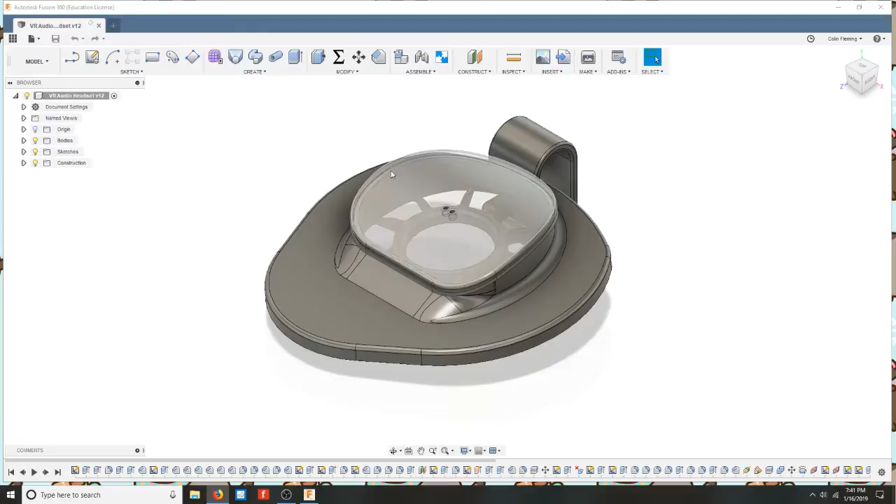Okay, so this should be going through. Okay. So here we have, let's just go to the beginning here first. Oh man, I have to explain all this.

So, I'll start with this. This is the driver area. This is the driver circle itself. That is the ring the driver fits in. It should fit in, but it turns out there's a glitch. Watch what happens when I try to change this to 43. Failed to solve, even though it clearly should be able to solve it.

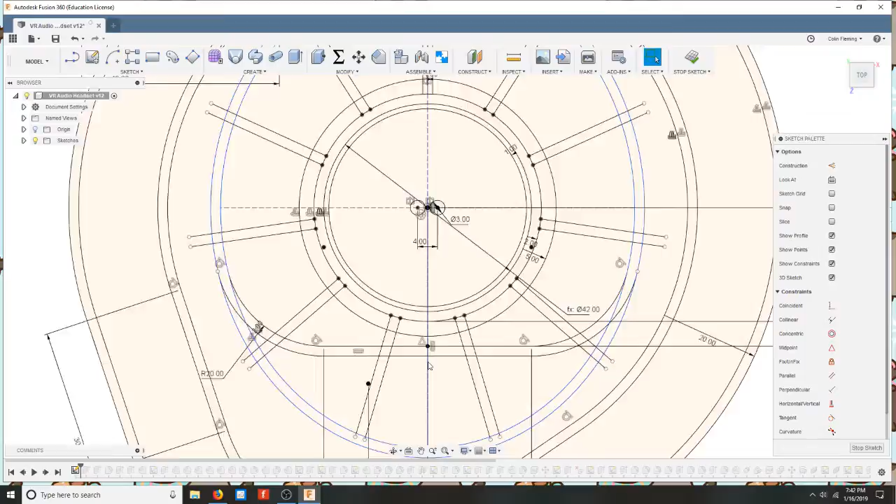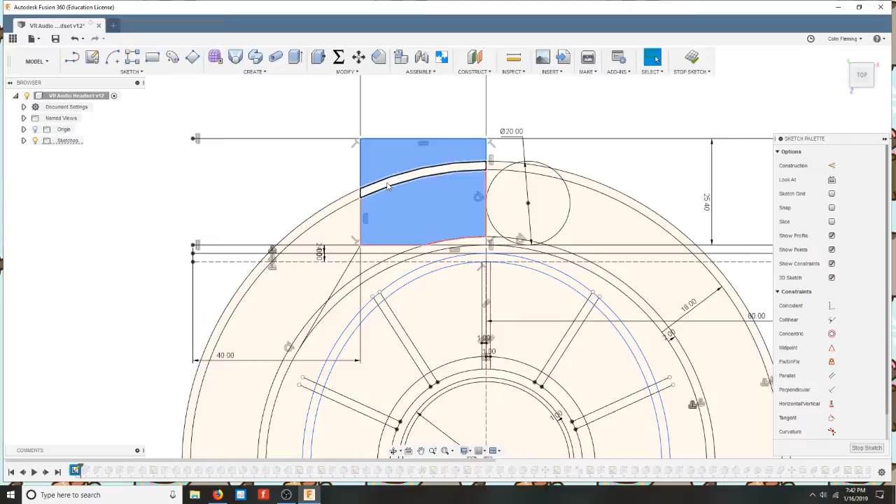So here, what is this one? Oh yeah, that's the pad area here, right here where that's highlighted. There we go, now you can see it. This, this little area in between, and that area. That's the area that will clip onto the band this sits on.

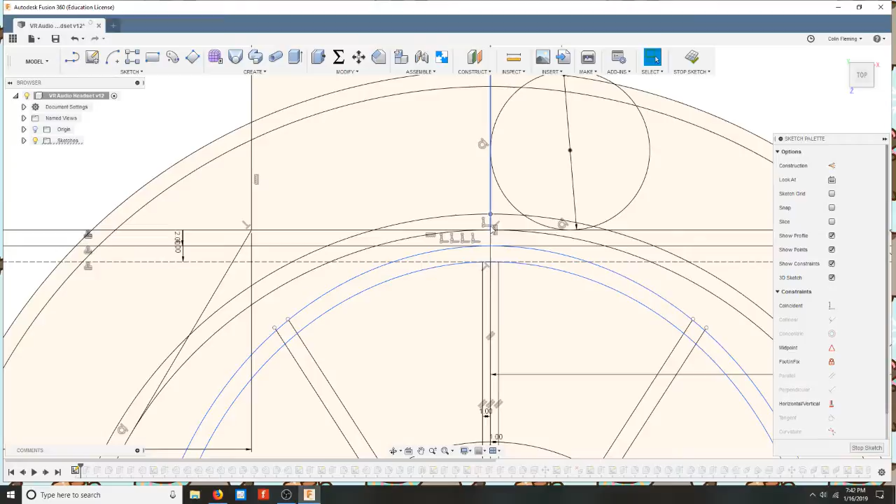Here's a little circle for a fillet, because one of the extrusions is gonna come up to here and get non-manifold at this point, right there. So now, here are all the ribs. Here's openings. Here's the bottom of the main acoustic cavity. Here's the edge of the acoustic cavity. There's more driver mounting area. Those are the ribs that hold the driver mounting area in place.

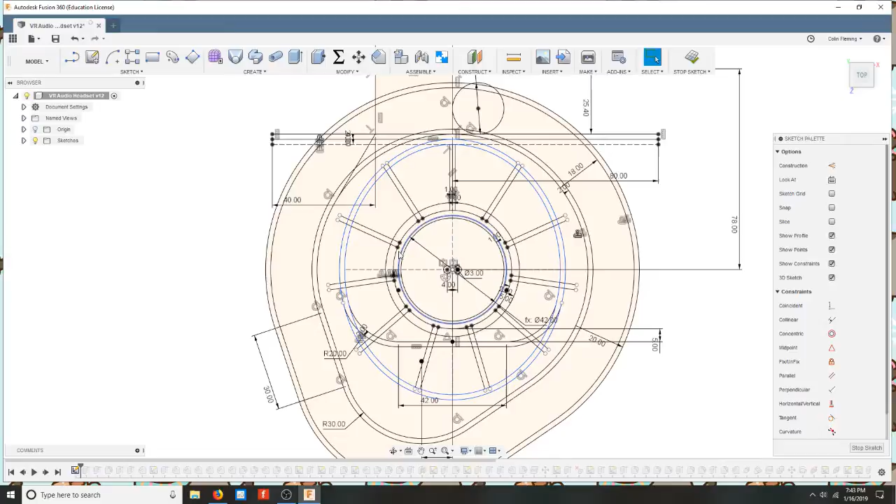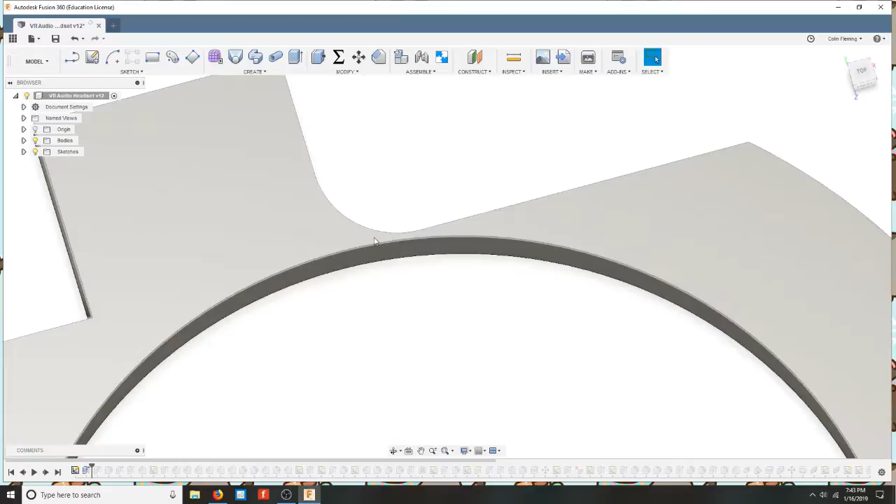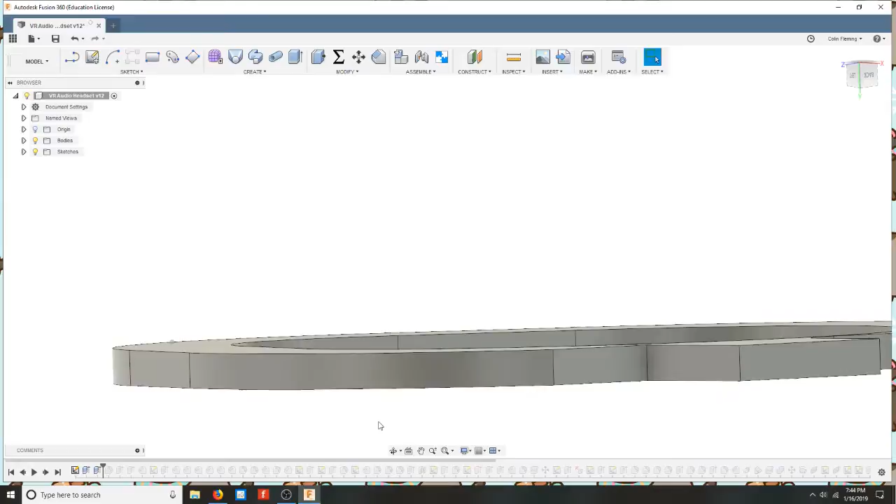Now let's go to the next step. We extrude this little thingamabob. Note how I use the circle up here to make it not go to 0 thickness at that point, right there. Next step. Now this gets extruded thinner. That was 6 millimeters before. This is 2.5. And there we have our basic shape with all the holes and then the driver hole.

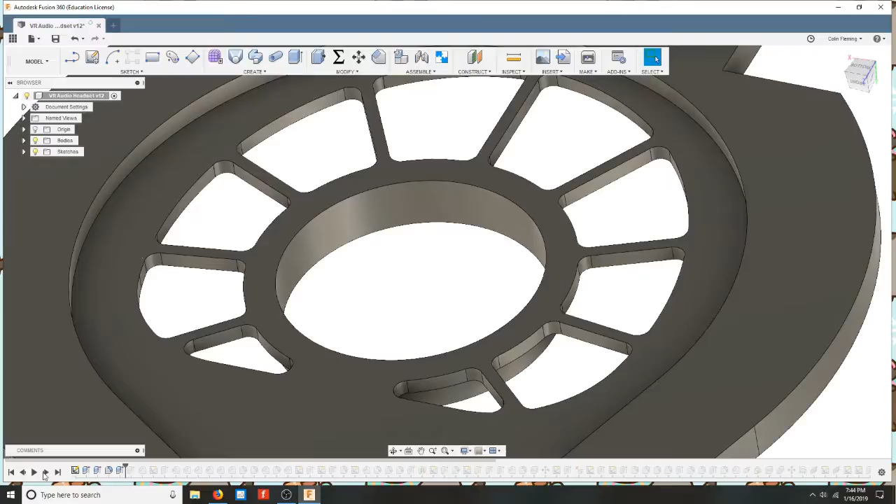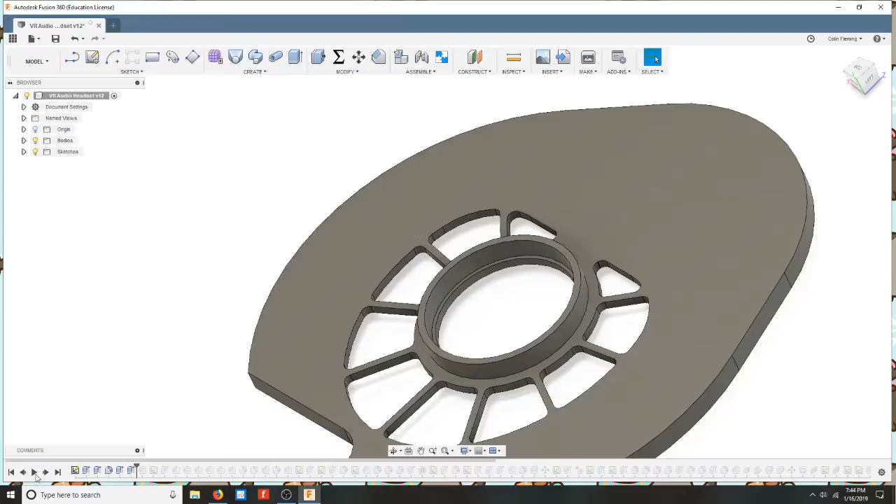And then those fillets for strengthening the holes. Here we start to make the driver mounting area. There we have the lip the driver rests against. There's the lip it rests in, and then a little lip inside that to give it a stop to get its position exact. Then we put a chamfer here to reduce the number of corners that are right by your skin.

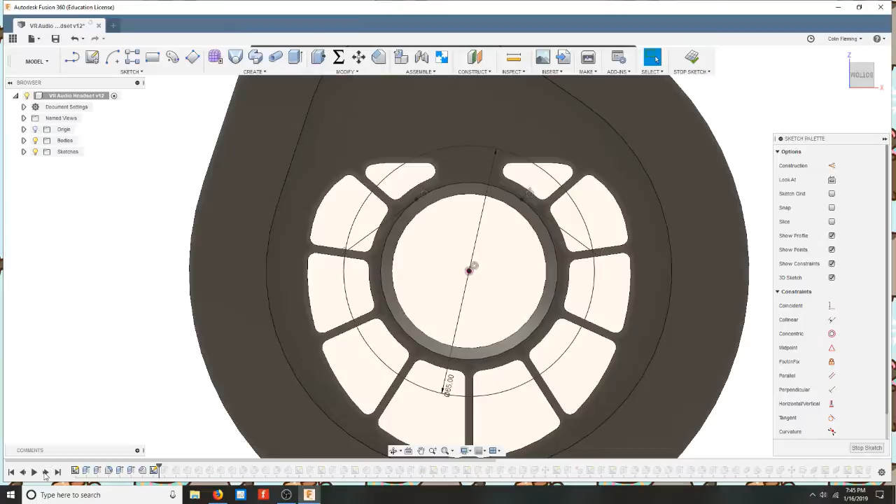Make a new sketch. This sketch starts laying out the way to bring those ribs and pull them out, but more in the middle than the outside, so they taper some for strength. And there we go, there's the sketch extruded. Next step, chamfer there. Next step, chamfer here. And boom.

Then we chamfer that because the driver needs to not be so tight right when it goes in. We chamfer that, then that, then that. These are uneven ones, so they're not 45 degrees; they're different angles for each one. That's why I did different operations for each. Then we round off all those corners, a bit of rounding on that corner, another chamfer on that corner because we can.

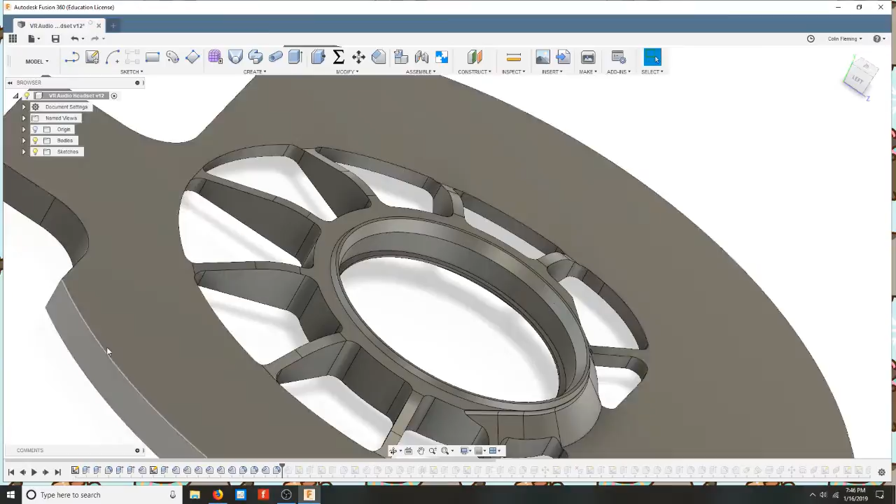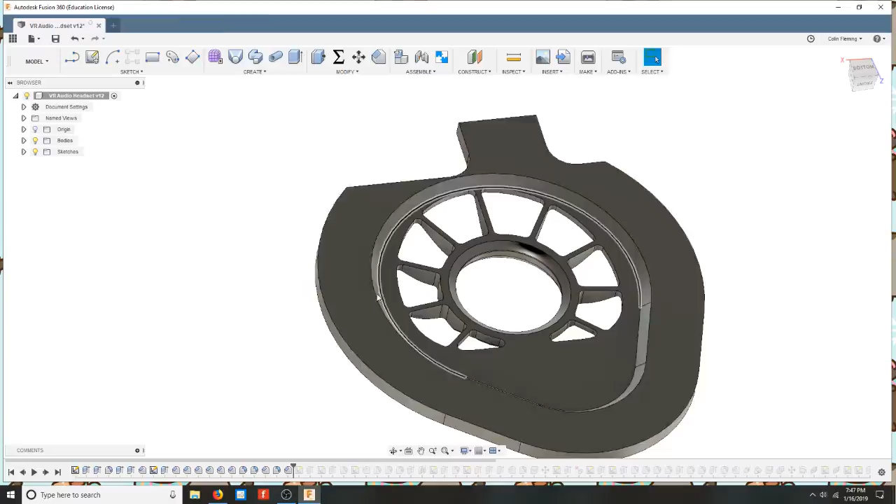Here we finally get around to rounding this corner, way over here. Fewer sharp corners by your ears there. Then a sketch: we start to make the clip and the base that it's going to print on. And another sketch to make that little piece. Fillet the inside here so it's round because the top of the band is round. The band is still made of solid plastic though.

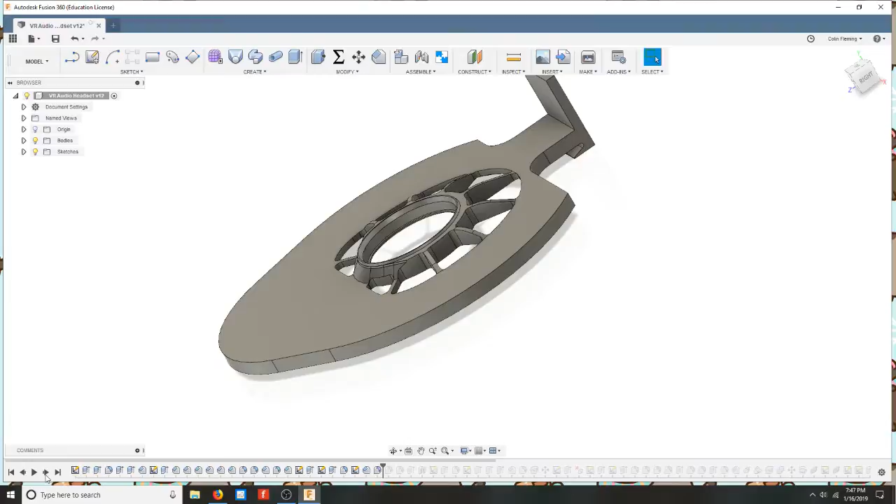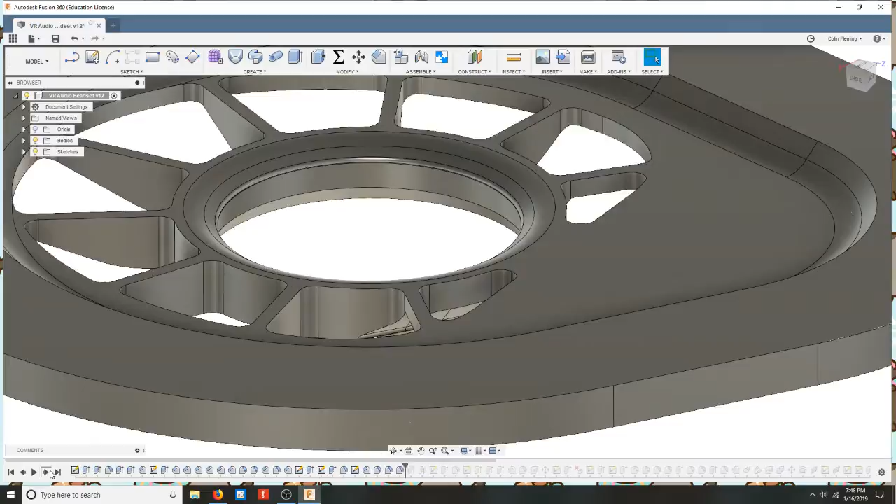Chamfer that. Fillet where? Oh, fillet around there, right on that. There. Round off that edge, and that edge, and that edge. There we go.

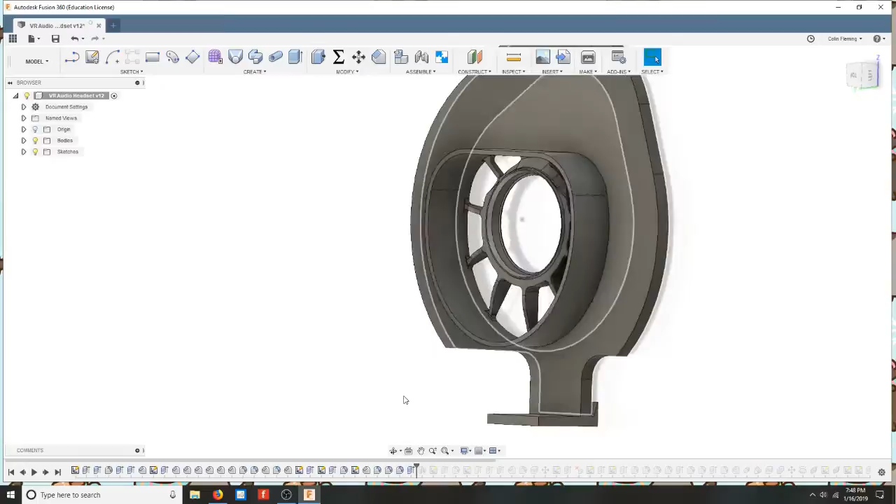Here is the side wall of the acoustic cavity. We don't want a flat back on the acoustic cavity because that makes all kinds of weird resonance. That's just our work plane; I added it to make things work later. Make a sketch, extrude. Fillet around all the tops here to make them not sharp. Acoustics this time, rather than ergonomics.

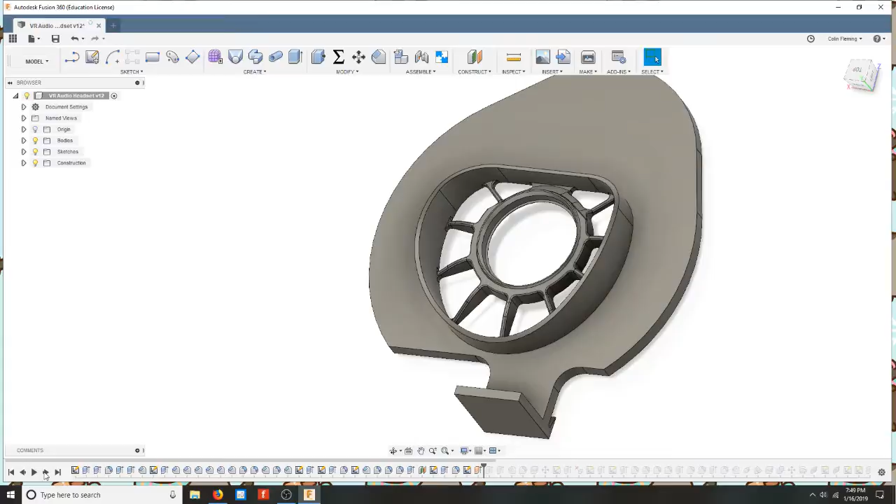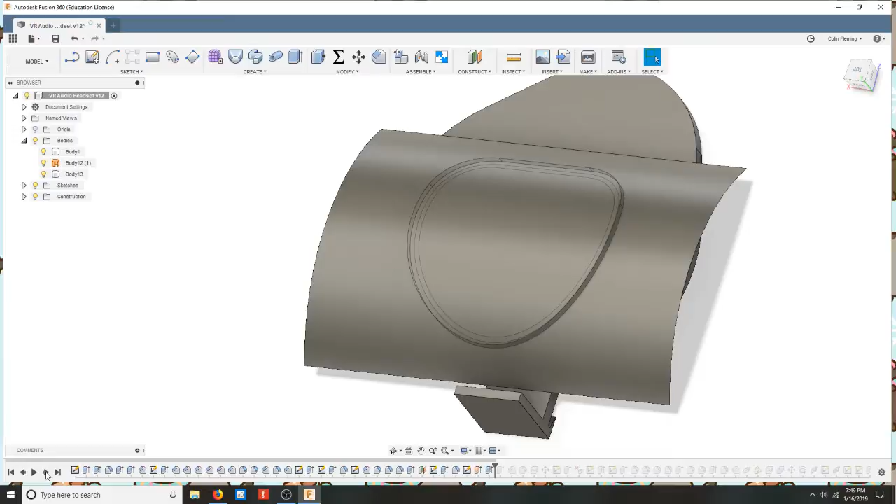Make another sketch. I projected a surface so I could extrude starting at this curved surface a set distance from there. And there you see me doing it, with this body, which I'm going to show solid. So there's the back plane of the back piece, the cover for the acoustic cavity.

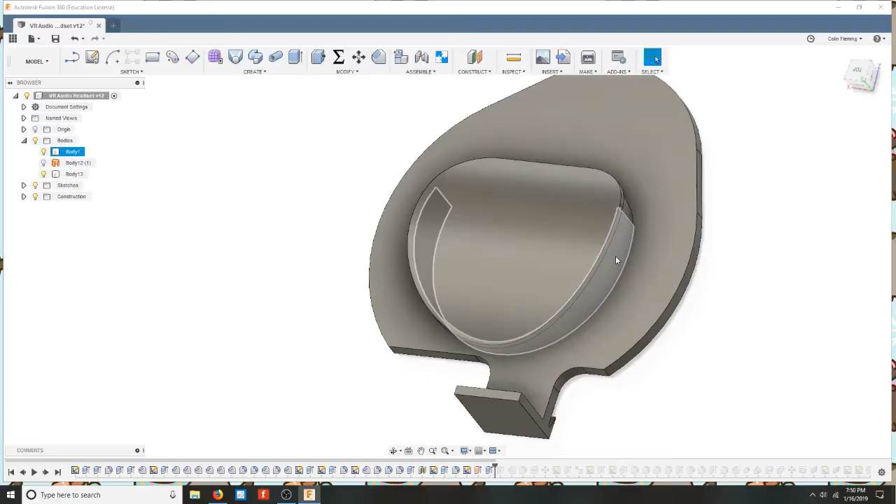That's what I forgot: a wire hole. I can add that later. Do I even need it? Yes, I do. I didn't leave a hole for the wires to the driver to get out of the acoustic cavity. Silly me. Have to know what size the wires are first, I guess.

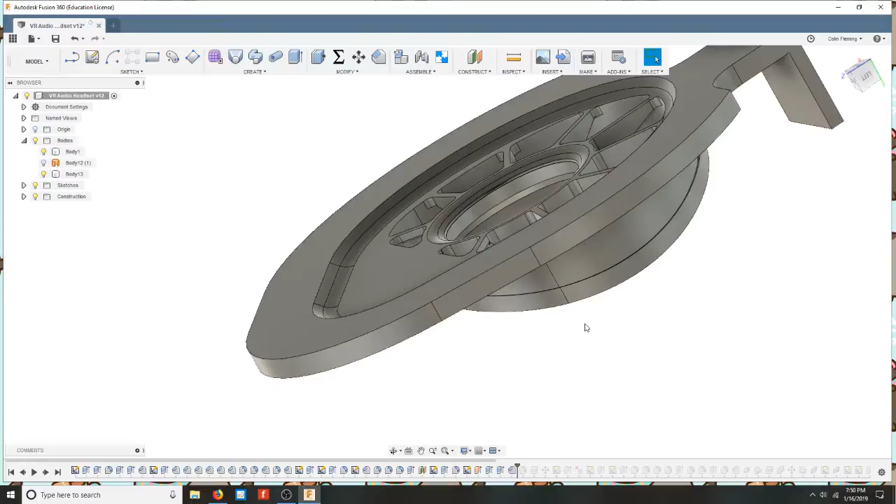Then we extrude down the outside, pulled the edge down that way. Then chamfer inside there. I really have to get in there to see it. Let's look right at that angle. There we go. Chamfer that so that it can go on. Fillet. Where the heck?

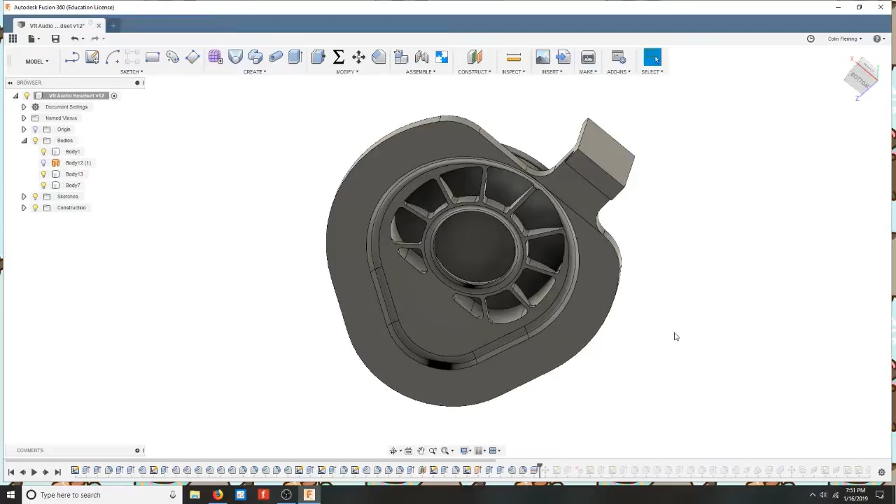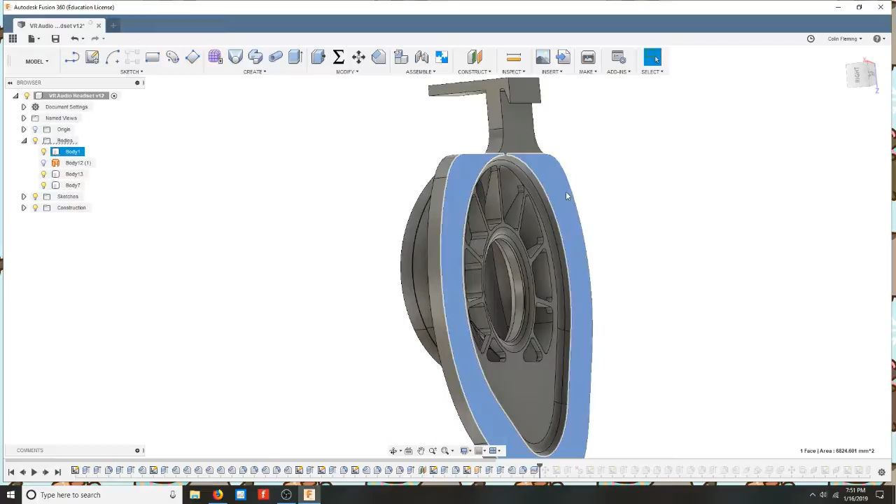Oh, those corners. See, then those corners get rounded. And then we split it right here, because I realized at this point, if you go like this, there's going to be a pad on this face, highlighted right there, and there's going to be a pad on that face. That pad's going to have thickness, and that band right here sits right against your head. It's not going to fit right if I do that. So the next step is just to move that over after we split it.

Then I draw a sketch, delete a face, draw a sketch, extrude it to make this more natural looking. Delete those curved faces there, and then it repatches itself. Advanced operation, sort of.

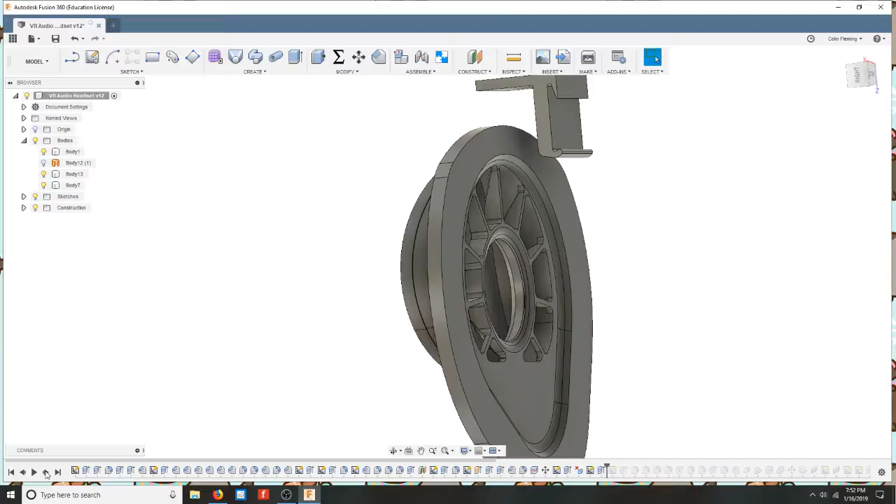And a sketch to extrude the bottom half of the clip, finally. Sketch, extrude the part that connects them. And fillet, fillet, fillet. Round off all that.

Now we extrude the rim that'll give me a reference for where the heck I'm supposed to put this pad exactly. Maybe a mounting for the pad later on.

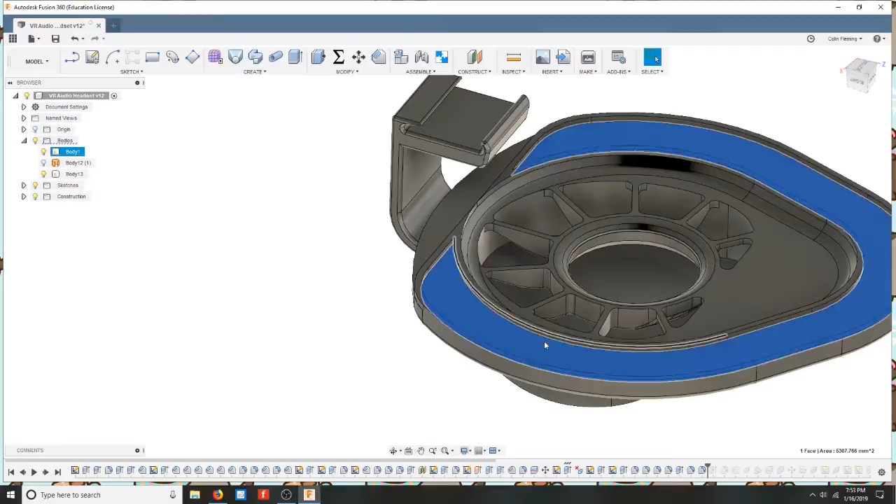So here we have this. Give me a sec. So now here we have this face, which is where the pad goes, and that face, which is the edge of where the pad goes.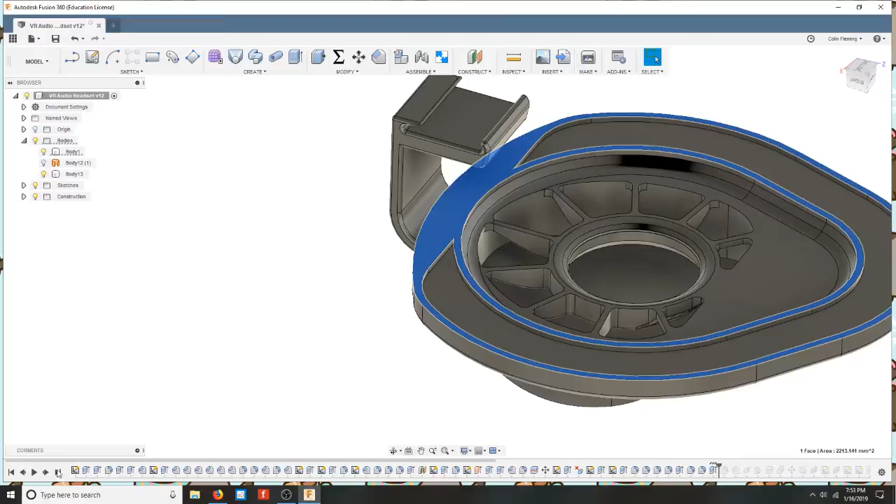Ah, yes, more fillets for acoustics and ergonomics this time. Chamfer, just so the border doesn't take up so much space.

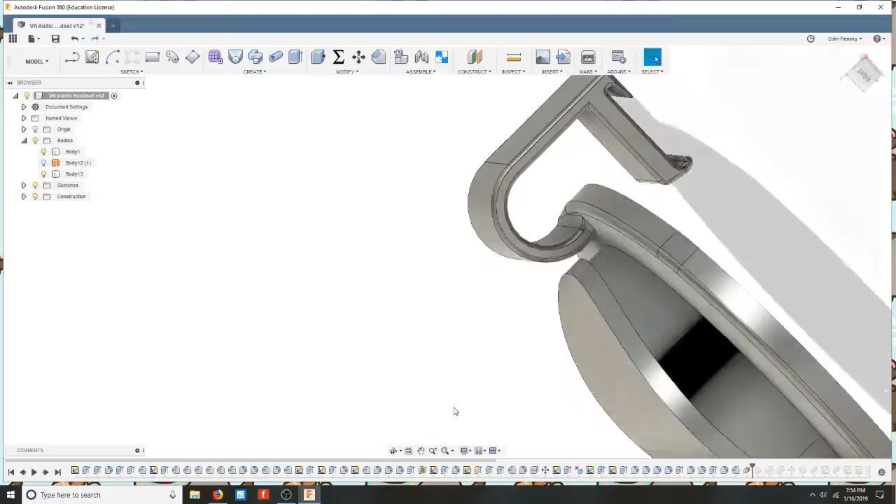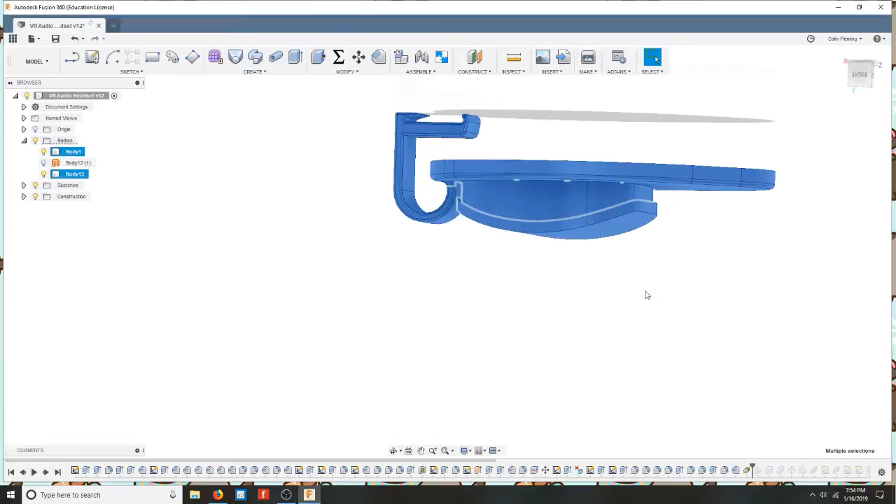Ah, here we go. This gets into the deep. This is an interesting process here, similar to moving the clip area, but we're gonna take this whole headphone thing, this whole area. Give me a sec. Rotate this so I can basically take that whole area, this whole area right here.

I'll just hold it. We're gonna take that whole area and rotate it 5 degrees inward so that it bends out and has some pressure on your ears so it doesn't bend off the bottom of the ear.

Plane at angle, split body right here. Oh, and right here. Oops. Can't avoid that. So we just combine it back together up here.

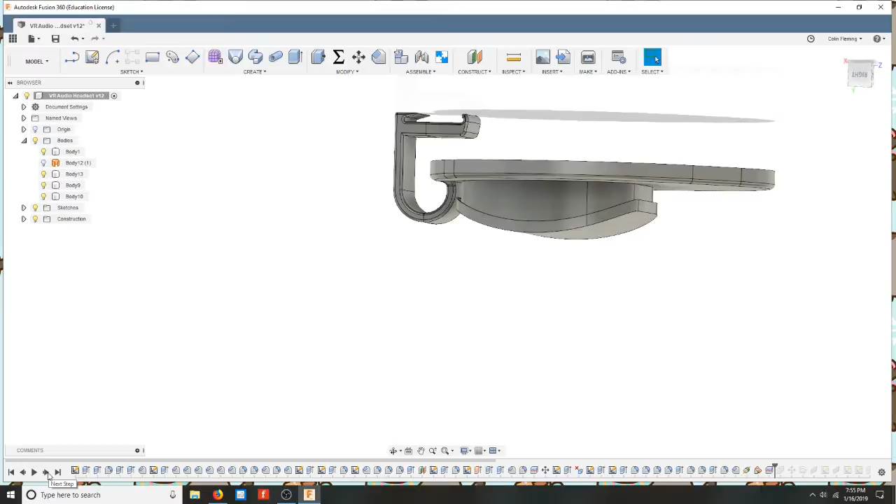Now there's the move. Oh, then we got a gap. So we revolve the gap 5 degrees, join operation. I'll go into this. So here you go. Angle 5 degrees, operation join. Okay, calculates, done.

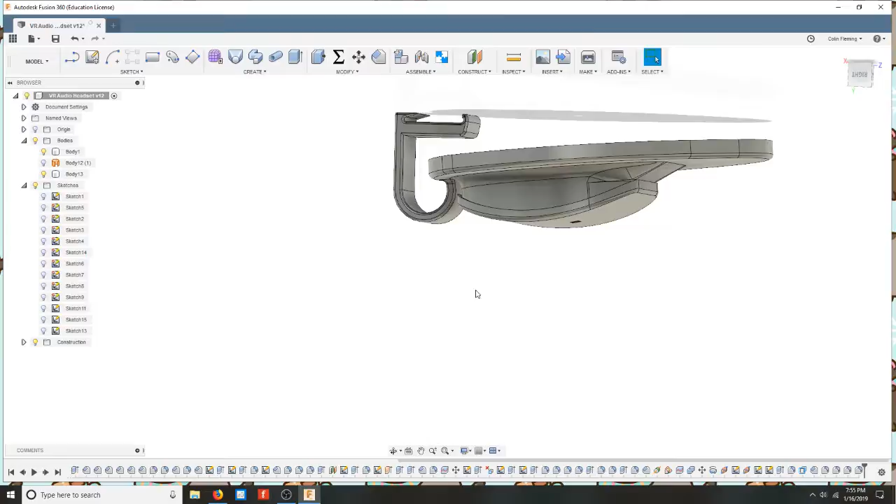What was this? So this is just refinements on, like, it looks like a really weird pair of headphones right now. And that made it look a little less weird.

Those holes, I mean, I've seen them in every Sennheiser pair I've ever seen, so I put them in. This is kind of roughly based on the HD280 Pros, and the HD380 Pros, and the HD201s.

Yeah, because those were all pretty good headphones. I'm actually wearing a pair of 380 Pros right now. But yeah, they're in okay condition.

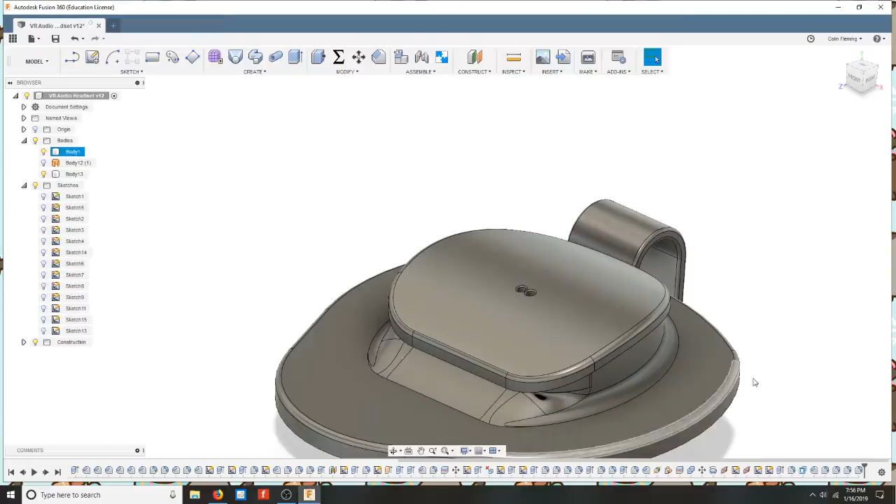Now... weird. Huh, meshing weird. So now we have our little headphone area, headphone clip adapter thing for a VR headset.

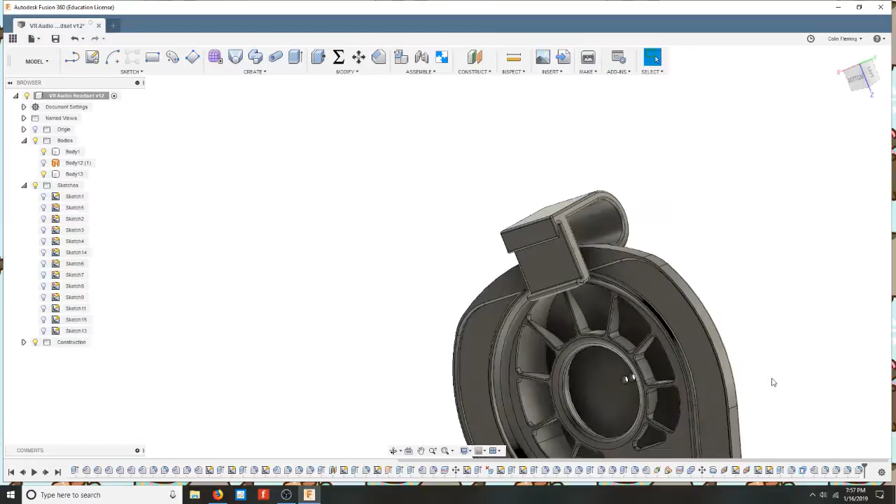And we can mirror that and print the other side. That's so completely trivial compared to everything we just did.

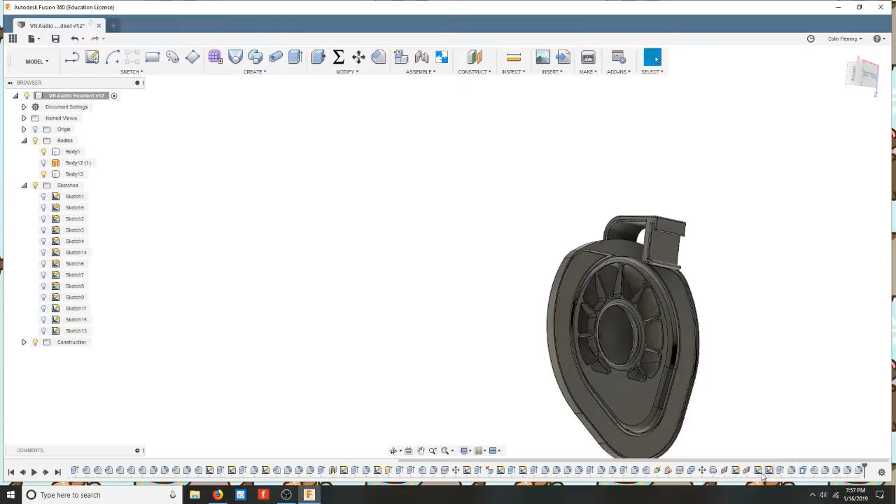Now, this operation, no, not that one. Oh, I still have to do something here. So what we're gonna do is go right in. Oh no. Where's my offset face? If not there. Oh, there we go. There's more to it. Or not. Yeah, that I can all delete.

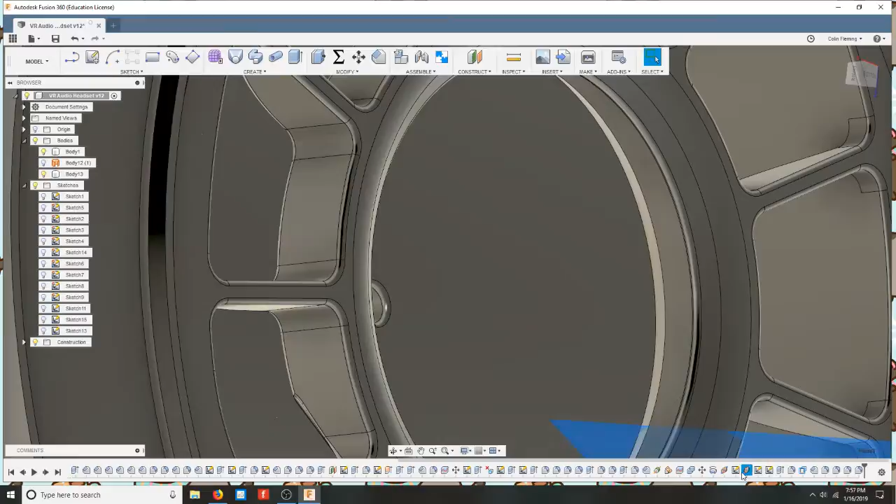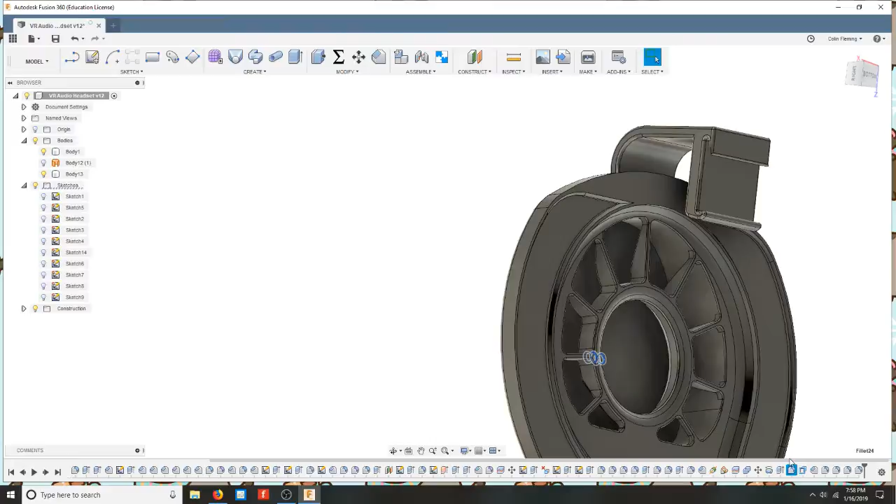Okay, now this extrusion was that. And that fillet around the edge for acoustics and strength. Offset, what was that?

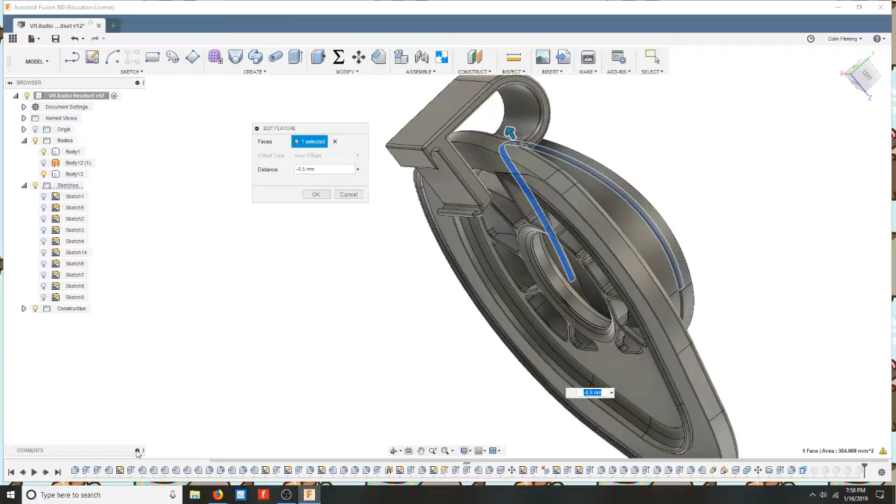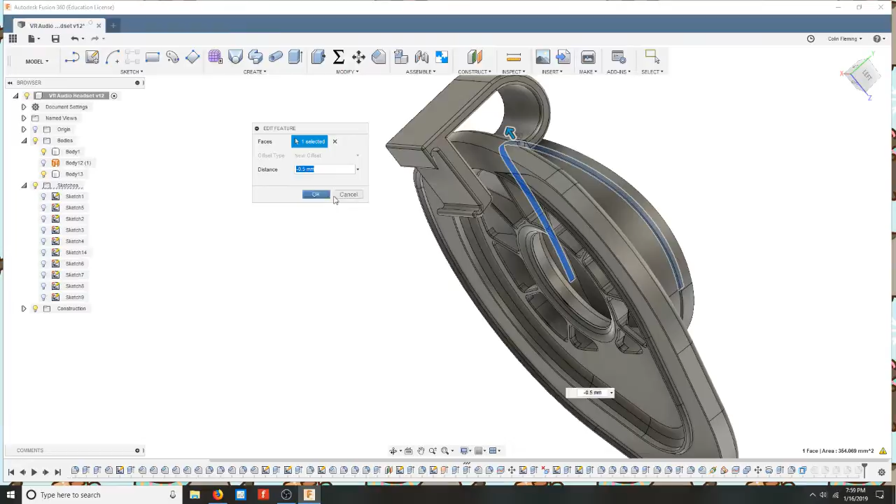Yep, okay, that was to make this cap fit looser, because with printers it's just, oh man, it's the dumbest piece of engineering ever. Not, well, there are dumber, but they are made for the parts to be expanded a little in surface offset. So you have to account for that when you put things together like this. Like right here, we're gonna have to radius 21 millimeters.

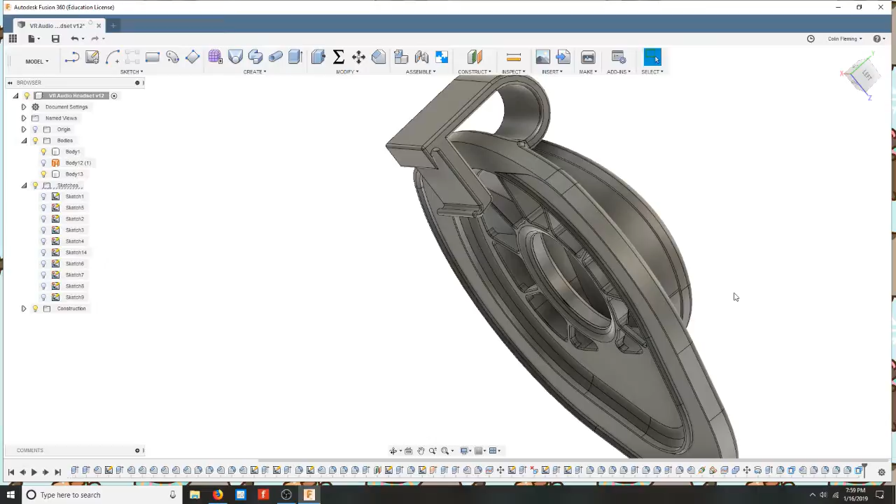Let's do this and go new offset, minus 0.4 millimeters. Radius 21.4 millimeters. So as you increase the radius, a 21 millimeter radius circle will now fit in there.

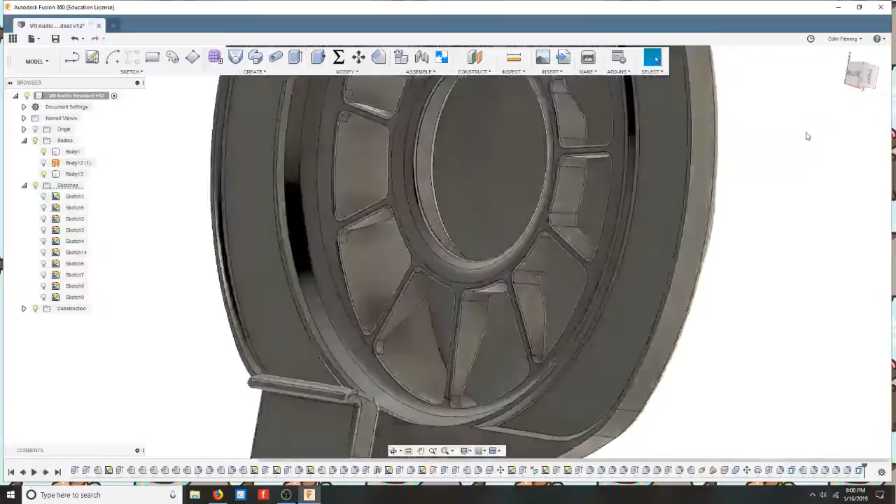It is so weird. Like if you machine it, you can get ungodly tolerances. If you print it, you can't, so unless you use really special printing techniques, at which point you might as well machine it anyway, and just redo the design totally differently.

Yay, into the sunset. Back. Okay. Yeah, I think that pretty much does it. Well, I should do a little bit more.

Appearance. These are going to be plastic.

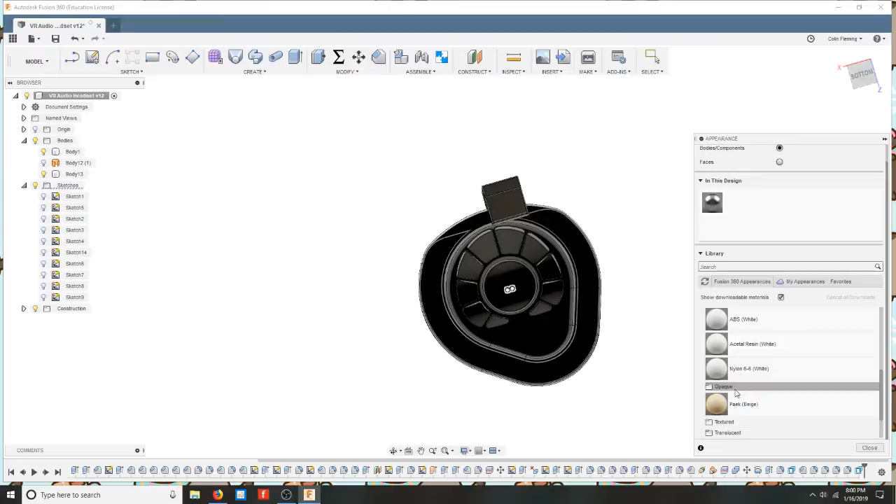It's an update. So our blue piece there, our white piece there.

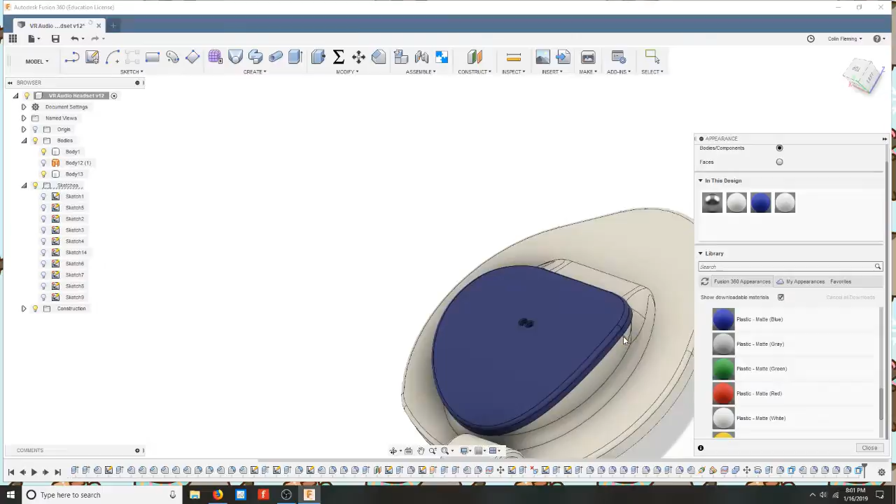Should we make that red and white for Valentine's Day? Or green and white? No, red and white for Valentine's Day. So there we go.

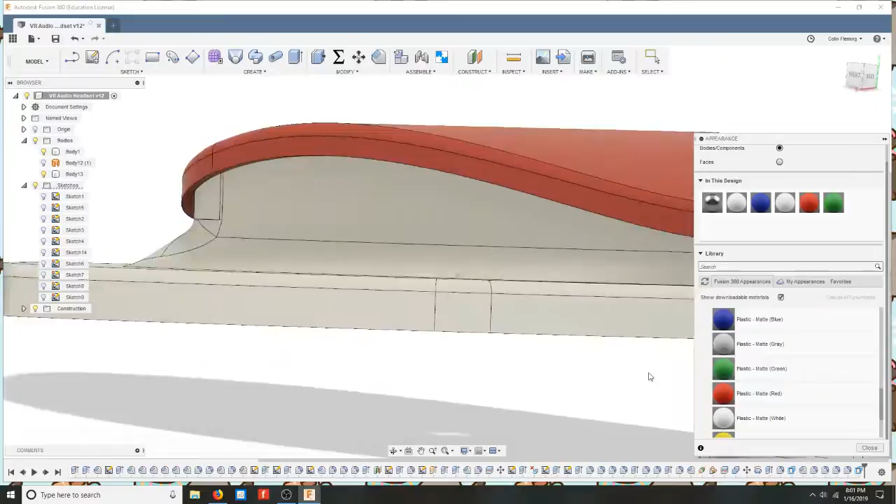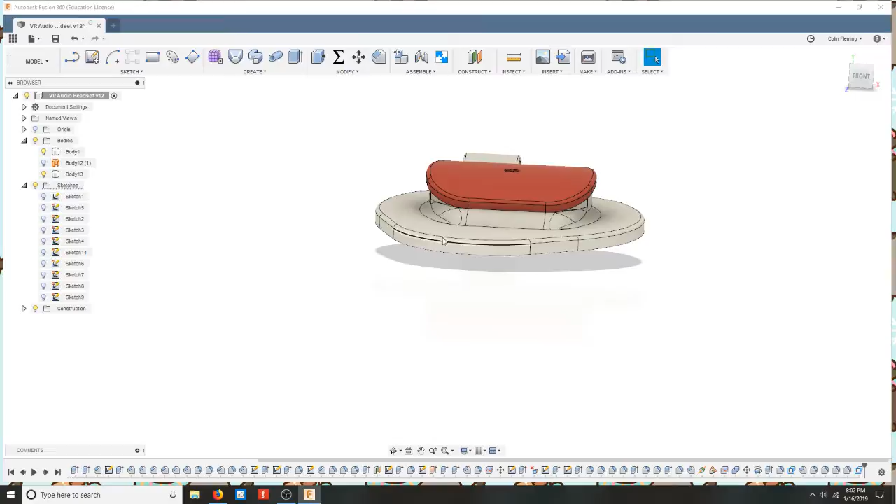Here's our ever so complex design. Now watch how fast I can calculate all this. And I will note that, so if I just go here, so modify, compute all. Okay. Compute it all, or didn't compute all.

I like to make a change in the very beginning sketch. Takes 10 seconds to update the whole thing. 10 seconds where you can't do anything, and it'll freeze if you do. But well, it won't freeze, it'll just hang or something. Well, there's that.